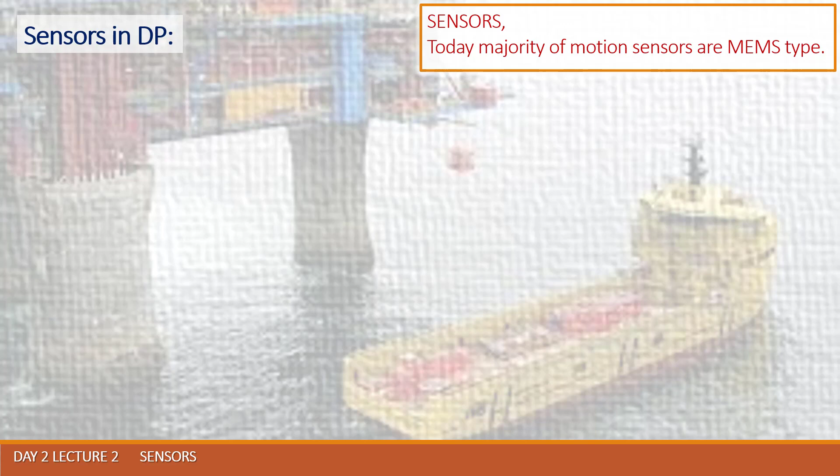Guys, this presentation was created to give you the main idea about MEMS type sensors, which nowadays are incorporated in much of the equipment around us. Even your mobile phone has some MEMS sensors built in.

In this tutorial we will learn how the MEMS accelerometer, gyroscope and magnetometer work and how to use them with the Arduino board. Also, with the Processing development environment, we will make some practical applications using the sensors. First, let's briefly explain how each of these microelectromechanical systems, or MEMS sensors, work. We will start with the accelerometer.

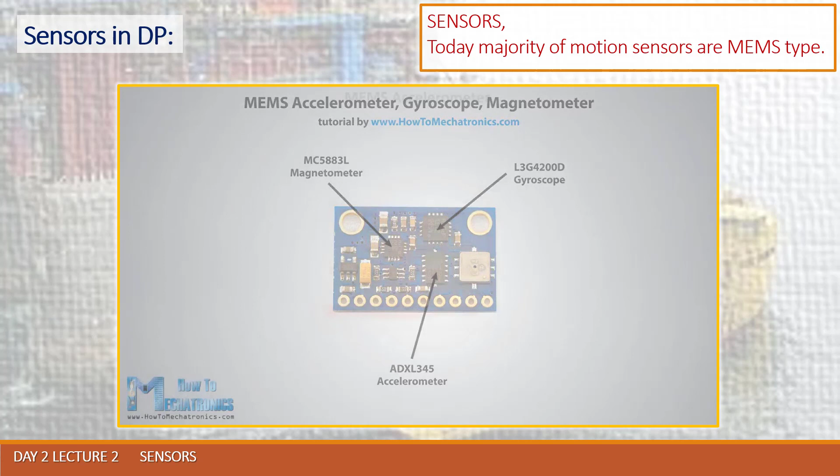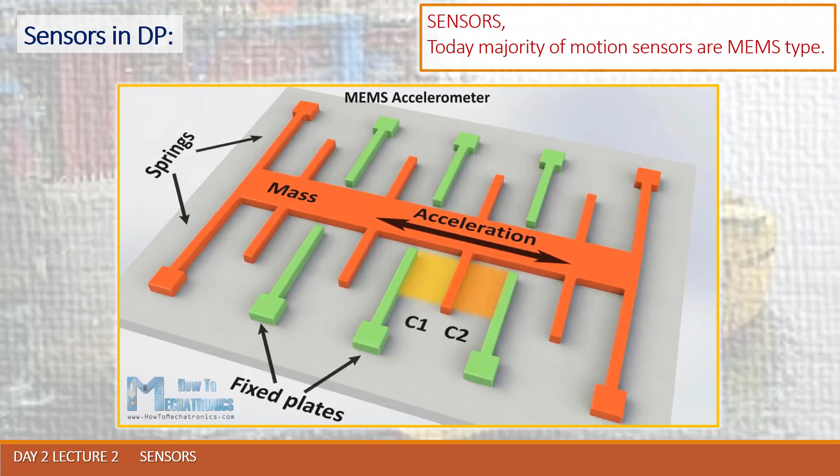It measures acceleration by measuring change in capacitance. Its microstructure looks something like this. It has a mass attached to a spring, which is confined to move along one direction, and fixed outer plates. So when an acceleration in the particular direction is applied, the mass will move and the capacitance between the plates and the mass will change. This change in capacitance will be measured, processed, and it will correspond to a particular acceleration value.

Next is the gyroscope, which measures angular rate using the Coriolis effect. When a mass is moving in a particular direction with a particular velocity, and an external angular rate is applied as shown with the green arrow, a force will occur as shown with the blue arrow, which will cause perpendicular displacement of the mass. So, similar to the accelerometer, this displacement will cause change in capacitance, which will be measured, processed, and it will correspond to a particular angular rate.

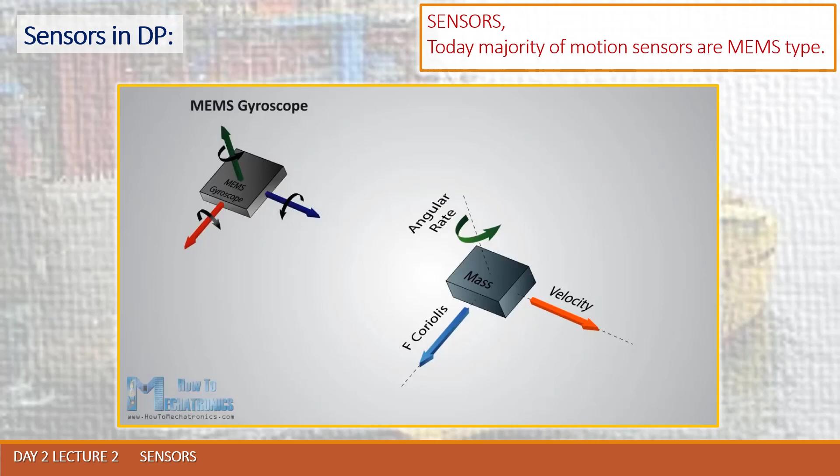The microstructure of the gyroscope looks something like this. A mass that is constantly moving or oscillating, and when an external angular rate is applied, a flexible part of the mass would move and make the perpendicular displacement.

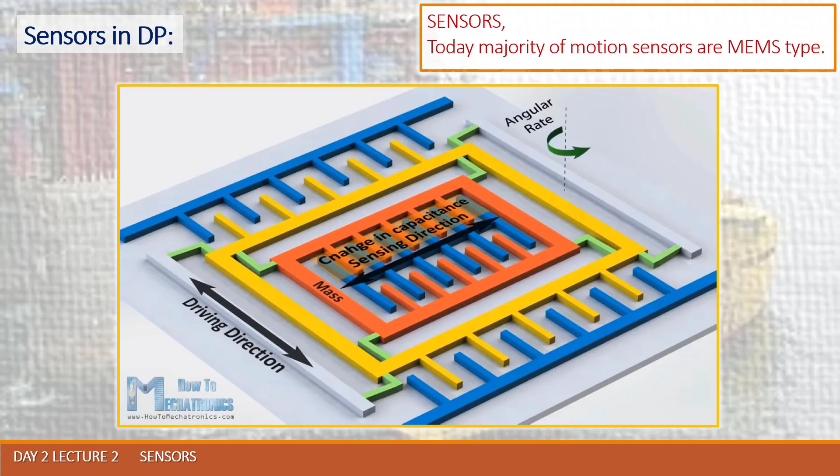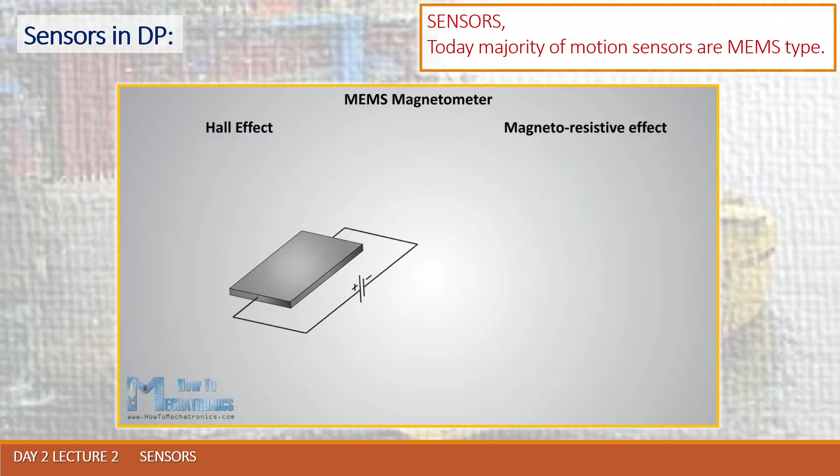Okay, now let's explain how the magnetometer works. It measures the Earth's magnetic field by using the Hall effect or magnetoresistive effect. Actually, almost 90% of the sensors on the market use the Hall effect, and here's how it works. If we have a conductive plate like this and we set current to flow through it, the electrons would flow straight from one to the other side of the plate.

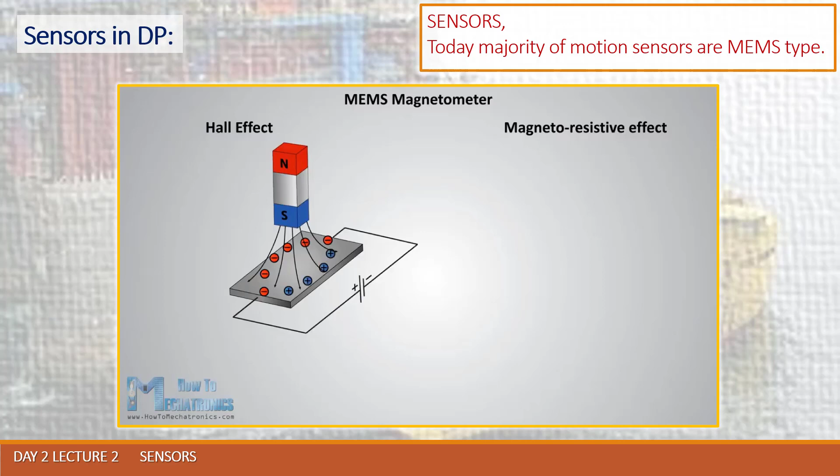Now, if we bring some magnetic field near the plate, we would disturb the straight flow and the electrons would deflect to one side of the plate and the positive poles to the other side of the plate. This means that if we put a meter between these two sides, we will get some voltage which depends on the magnetic field strength and its direction.

The other 10% of the sensors on the market use the magnetoresistive effect. These sensors use materials that are sensitive to magnetic field, usually composed of iron and nickel. So when these materials are exposed to magnetic field, they change their resistance.